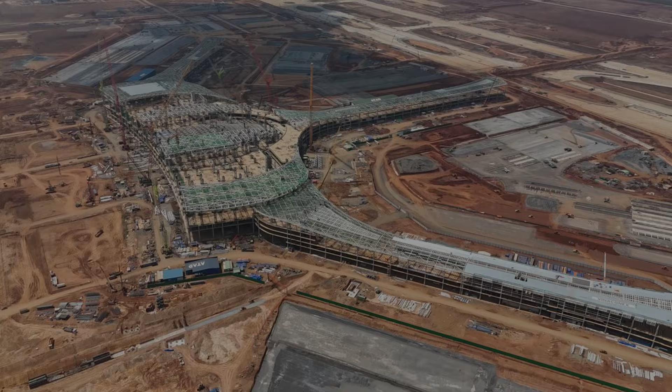Concrete does not merely dominate the construction industry. It is the construction industry, in a way that no other material has ever dominated any other sector of the built environment. It is embedded in every building code on the planet.

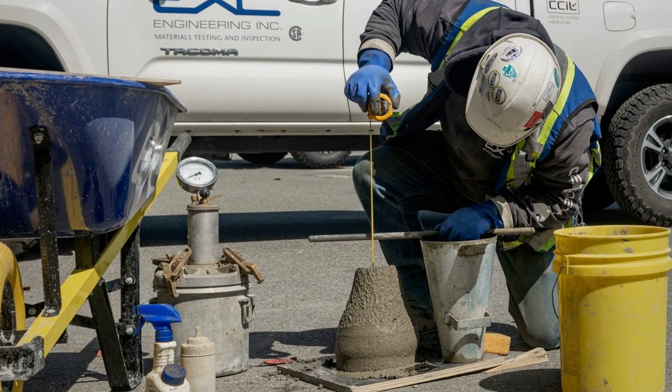The structural calculations that determine how thick a wall must be, how deep a foundation must run, and how wide a bridge deck must span are calibrated around concrete's specific properties and have been for over a century. It is embedded in every engineering curriculum so that every structural engineer trained in the last 100 years has learned to think in concrete first, and ask about alternatives second.

It is embedded in every supply chain, the quarries, the grinding mills, the batch plants, the ready-mix trucks, the pump systems, a global industrial infrastructure worth trillions of dollars that exists for one purpose and cannot be repurposed overnight. The carbon problem inside this system is not a side effect of how concrete is made. It is a consequence of what concrete requires.

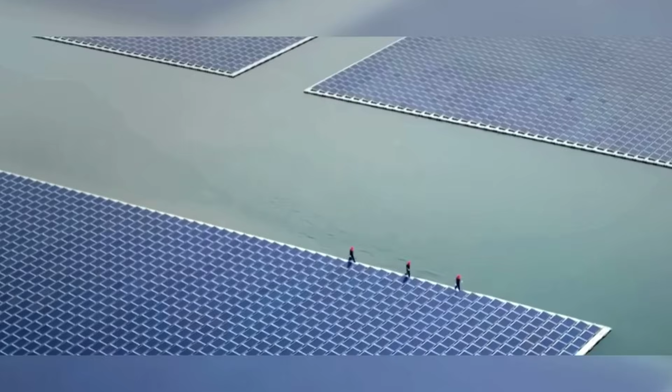Cement, the binding agent that gives concrete its structural properties, is produced by heating limestone to 1,400 degrees Celsius in a rotary kiln. At that temperature, calcium carbonate in the limestone breaks down into calcium oxide and carbon dioxide. This reaction is called calcination. The carbon dioxide it releases is not combustion waste. It is not the exhaust of a dirty power source that could be replaced with a renewable one. It is a direct molecular output of the chemical transformation that makes cement possible.

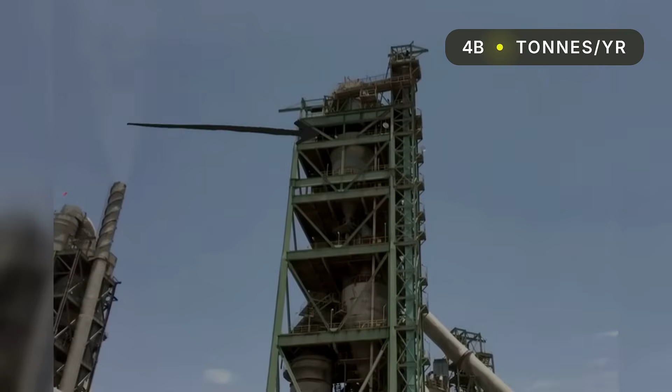Approximately 60% of cement's total carbon emissions come from calcination alone, regardless of what fuel powers the kiln or how efficiently the facility operates. The remaining 40% comes from burning fossil fuels to reach the required temperature, a portion that cleaner energy can theoretically address. The 60% cannot be addressed by an energy transition at all. Global cement production currently stands at approximately 4 billion tons per year, generating roughly 2.9 billion tons of CO2 annually from calcination alone. The industry did not ignore this.

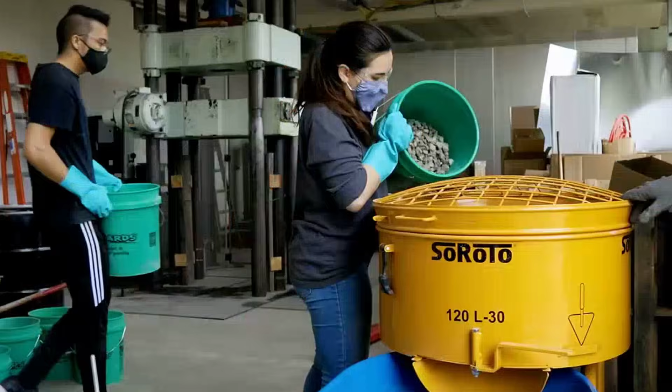Research institutions, engineering schools, and climate bodies spent decades cataloging alternatives. Geopolymer cements, binders made from industrial waste products like fly ash and slag, were identified as a promising path in the 1970s and remain promising today, with a global market share of less than 2%. Supplementary cementitious materials, partial replacements for clinker in the cement blend, have been adopted widely, but hit a ceiling determined by structural performance requirements that conventional building codes will not bend.

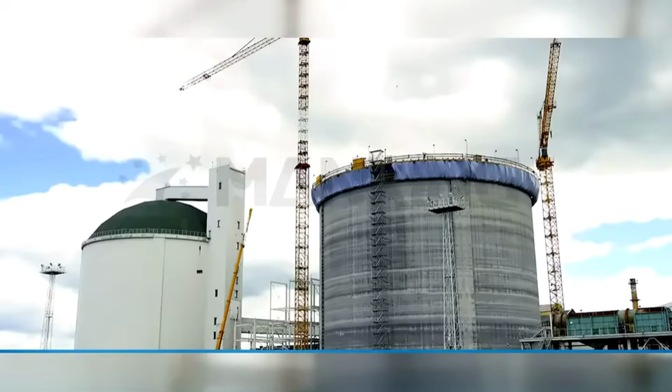Carbon capture, retrofitted to cement kilns, has been piloted at significant expense and remains economically unviable at scale in every competitive construction market on Earth. By the early 2020s, the industry's collective position was not denial. It was something more uncomfortable than denial. It was structural resignation, the acknowledgement that the problem was real, the paths were insufficient, and demand was not slowing down.

Global cement consumption is projected to grow by 12 to 23% by 2050 as South and Southeast Asia continue urbanizing at rates the developed world has not seen since the mid-20th century. The lock system was not shrinking, it was expanding. The research coalition that changed this did not emerge from the institutions that had been working longest on the problem. It was not a European cement company with decades of carbon capture investment, not a North American materials science consortium backed by Climate Foundation grants, not a United Nations industrial transition program.

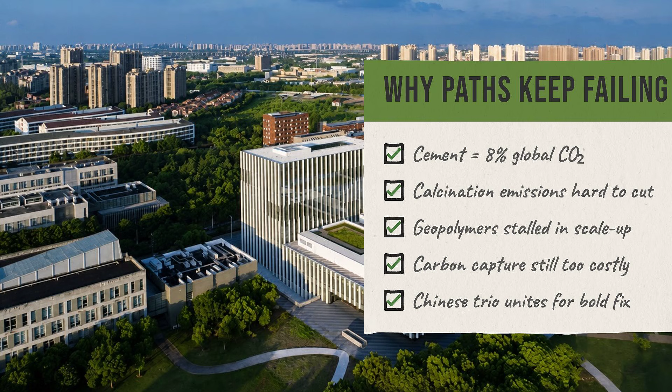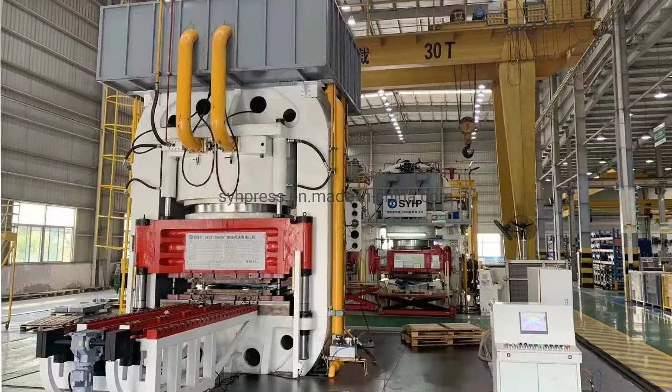It was a coordinated, multi-institution effort spanning Tongji University, the China Building Materials Academy, and Shanghai Jiao Tong University, three institutions with overlapping but distinct technical competencies, whose collaboration on this specific question appears to have been deliberate rather than incidental, and whose combined resources included industrial-scale hydraulic pressing equipment that most university research facilities in the world do not possess. The prevailing research direction in construction materials science at the time was focused logically enough on the ingredients.

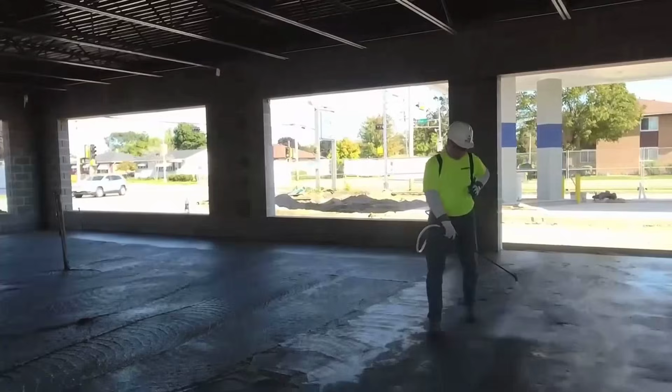If the carbon problem is in the limestone, change what you use instead of limestone. If the durability problem is in the water to cement ratio, develop chemical admixtures that allow lower ratios without sacrificing workability. If the structural ceiling is in the aggregate bond, develop new surface treatments that improve adhesion at the microscopic level. These were reasonable questions pursued by serious researchers, and they had produced incremental gains over 4 decades without producing a result that restructured the economics of the material at scale.

The Tongji-CBMA-SJTU team approached the problem from a different angle. Not the ingredients, not the chemistry, not the binding mechanism. They asked instead what happens to concrete in the 30 seconds after it leaves the mixer, the window during which fresh concrete is still a plastic, workable material whose final microstructure has not yet been determined by the hardening process.

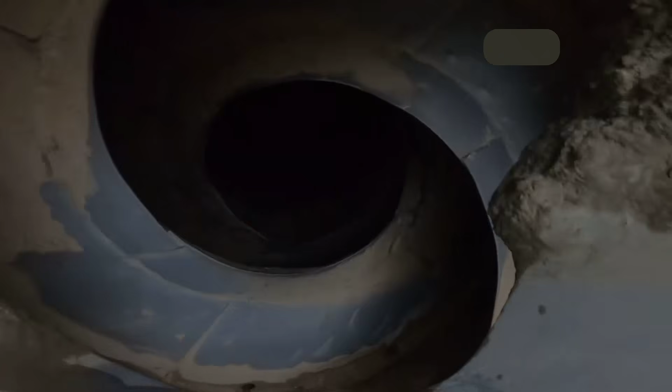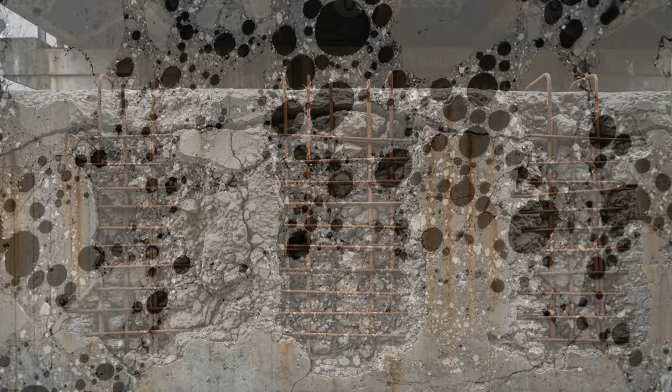In that window, the mix contains excess water beyond what the hydration reaction actually requires, and it contains trapped air introduced during mixing. Both are structural liabilities. Excess water, as it migrates out during curing, leaves behind a network of capillary pores. Trapped air remains as voids. Both reduce density, reduce strength, and create pathways for water, chlorides, and other agents of long-term deterioration to enter the hardened material over decades of service life.

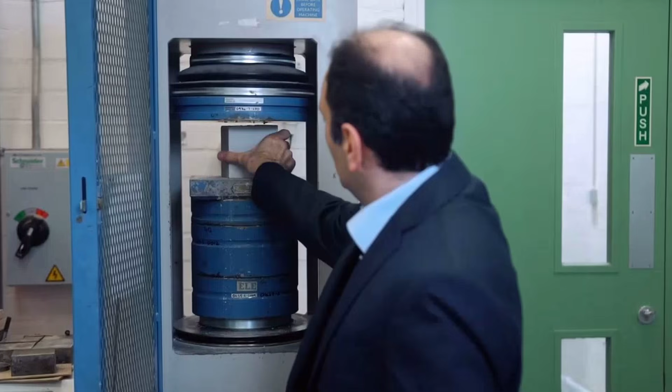The team's hypothesis was straightforward. If you could mechanically remove those liabilities before the concrete hardened, the material you were left with would be fundamentally denser and stronger than anything the same ingredients could produce under conventional curing.

They published the results under a fully open license, raw data sets, microscope imaging, and nanomechanical test results made available to any research institution or engineering body that wanted to examine them, at a moment when the industry's default posture toward process innovation was proprietary lockdown.

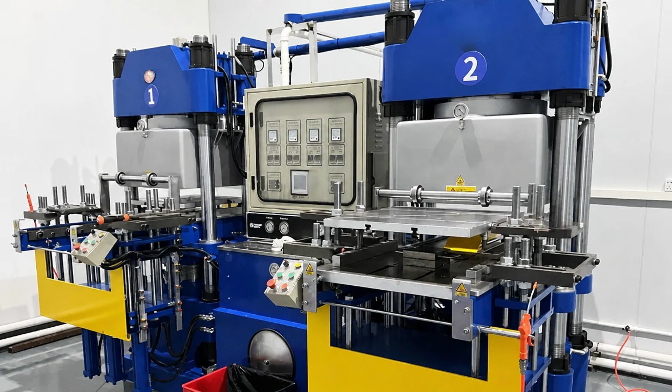The process is called compression casting. Fresh concrete, mixed to standard specifications using standard cement, standard aggregate, and standard water, is placed into a hydraulic press and subjected to between 5 and 15 megapascals of applied pressure while still in its plastic state.

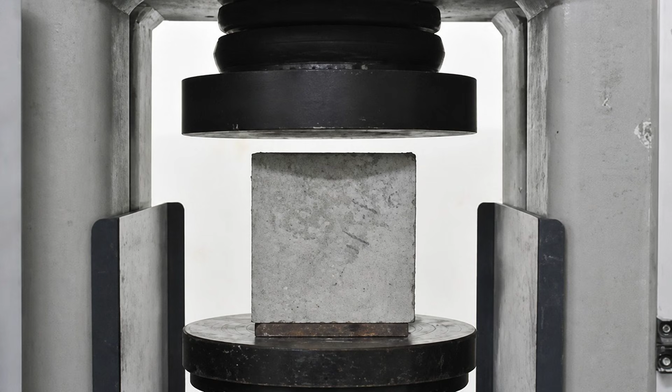1 megapascal is approximately 145 pounds per square inch. The pressures used in compression casting are, at the upper range, equivalent to the force at the bottom of a column of water 1.5 kilometers deep. Applied to wet concrete, that force does two things simultaneously.

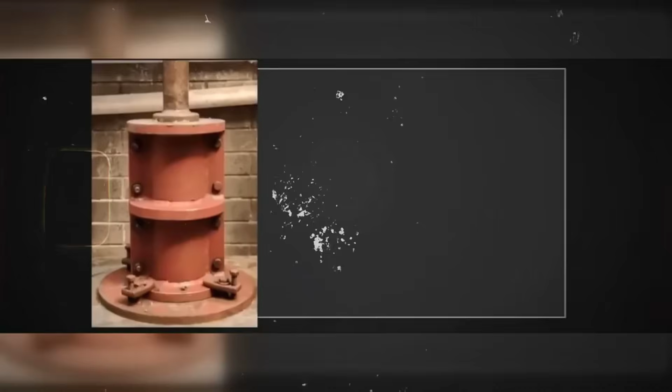First, it expels excess water and trapped air, the two structural liabilities the Tongji CBMA-SJTU team had identified as the primary sources of long-term weakness, are driven out of the mix under pressure. What remains is a denser, more uniform matrix with a substantially lower water to cement ratio than the mix started with, achieved not by reducing the water added during mixing, but by removing it mechanically after mixing, a distinction with significant practical consequences for workability and placement.

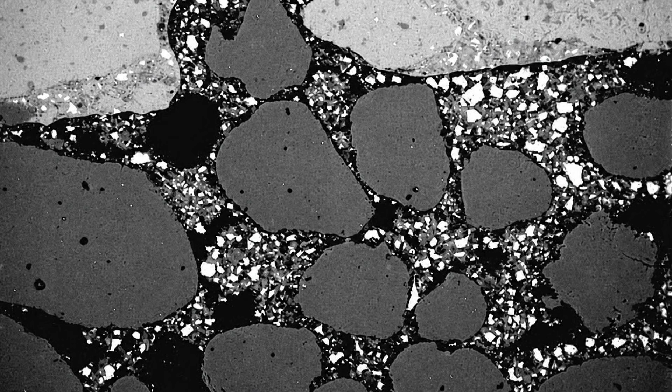Second, it collapses the interfacial transition zone, the boundary layer between cement paste and stone aggregate, historically the weakest point in any concrete structure. Under standard curing conditions, this zone has a higher void content than either the paste or the aggregate on their own, because water films form around aggregate particles during mixing and impede the tight packing of cement grains at the contact surface. Under compression, those voids collapse.

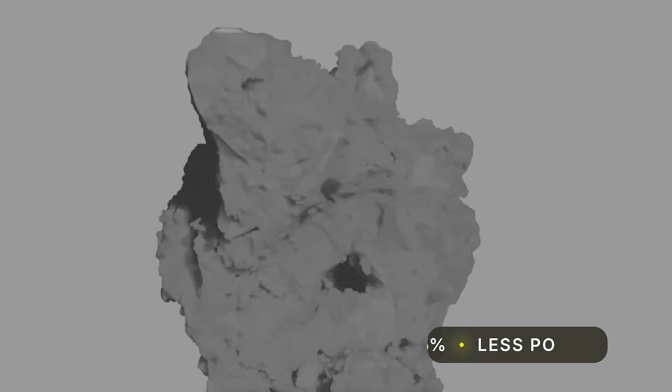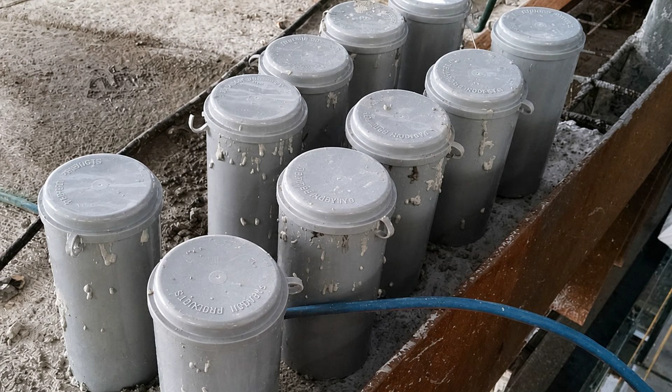The team's measurements showed a 35% reduction in void content at the transition zone compared to equivalent standard cured concrete. Total internal porosity across the sample fell by 45%. The consequences cascade. A 45% reduction in porosity does not produce a 45% increase in compressive strength. The relationship between density and strength in concrete is nonlinear. At the highest pressure ranges tested, compressive strength increased by over 80% relative to identically proportioned standard concrete.

Resistance to water intrusion improved substantially. Resistance to freeze-thaw cycling, the mechanism responsible for a significant share of infrastructure deterioration in cold climates, improved. Resistance to chloride penetration, the process by which dissolved salts migrate through concrete and initiate corrosion of steel reinforcement from the inside outward, improved to a degree that projected service life extensions measured in decades rather than years. Same cement, same stone, same water, different handling.

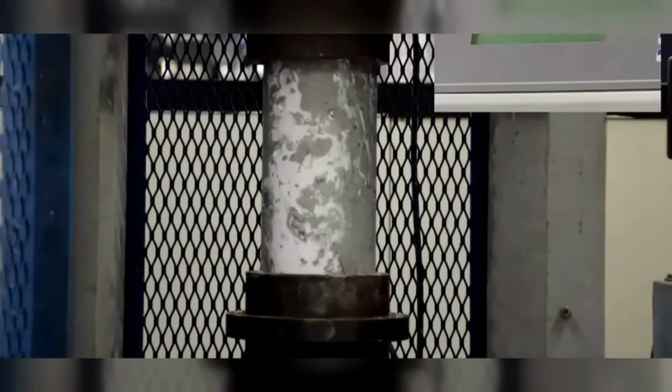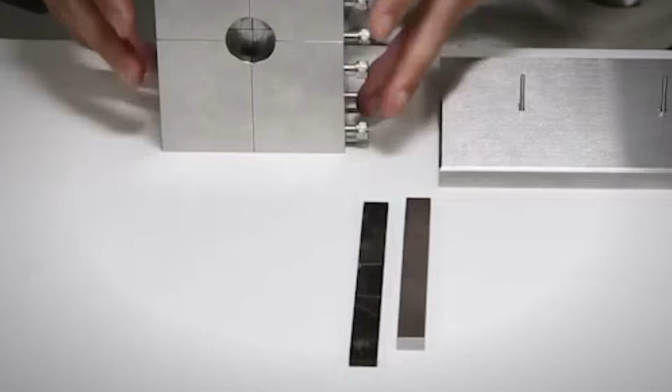Engineers in Germany, Japan, and South Korea responded by filing patent families and initiating highway trials before the ink on the published datasets had finished drying. The laboratory results were, by any measure, exceptional. An 80% compressive strength gain from a process change requiring no new materials is not the kind of result that appears in peer-reviewed construction engineering literature without attracting immediate and intense scrutiny, which is precisely why the Research Coalition did not ask the engineering community to take the laboratory results on faith.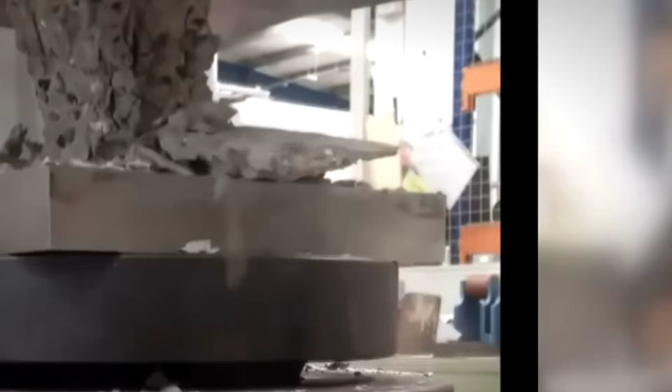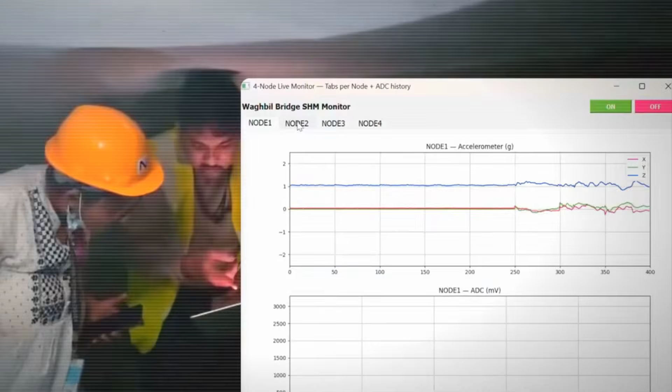They built a bridge. The Jiang River Trial, 150 meters of bridge deck, constructed using compression cast concrete and instrumented throughout with continuous strain gauges and moisture sensors, was not a controlled laboratory environment. It was a working structure, subjected to live traffic loads, seasonal temperature variation, and the full range of environmental stresses that determine whether a material performs in the real world the way it performs under controlled conditions. The sensors embedded in the deck were not there to make the structure more interesting. They were there to generate a continuous, publicly available record of in-service performance that any engineer anywhere could examine independently.

Over 12 months of monitored service, the bridge deck delivered an average in-service compressive strength of 61 megapascals. The laboratory models had predicted 61 megapascals. The match was not approximate. It was exact. Or as exact as measurement precision in civil engineering field conditions permits, which is a different and more meaningful standard than laboratory precision, because it incorporates every source of real-world variability that laboratory conditions exclude by design.

Zero visible cracking was recorded across the full observation period. Moisture sensor readings remained stable throughout, indicating that no water intrusion pathway had developed in the hardened concrete matrix despite 12 months of cyclic loading and environmental exposure.

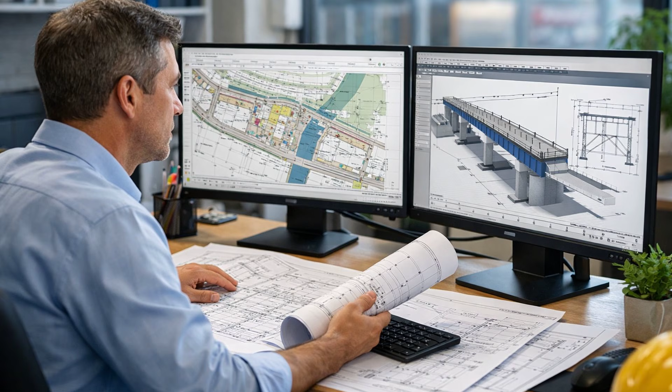What the Jiang trial produced was not a press release. It was independently verifiable field evidence, a data set available to any research institution or government engineering body that wished to replicate the analysis, stress test the conclusions, or use the performance record as the basis for regulatory review. The global engineering community had been handed not a claim but a proof, documented in a format designed to withstand the scrutiny of the most demanding technical audiences in the world.

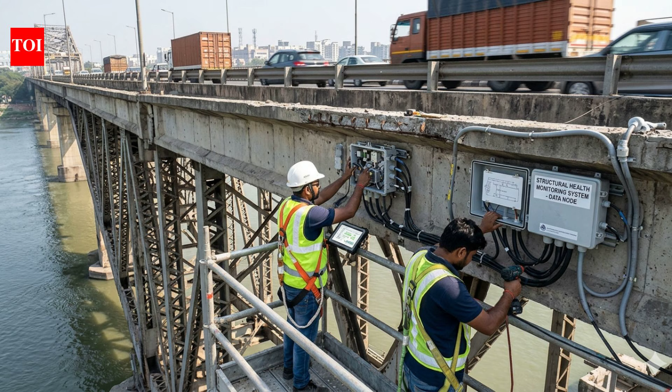Research teams in Germany had already begun highway trials using compression cast prefabricated elements. Japanese infrastructure planners had begun regulatory review. South Korean engineering firms had begun integrating the process into smart city pilot programs. The field evidence had arrived, and it had matched the laboratory predictions with a precision that left the skeptical case with very little to stand on.

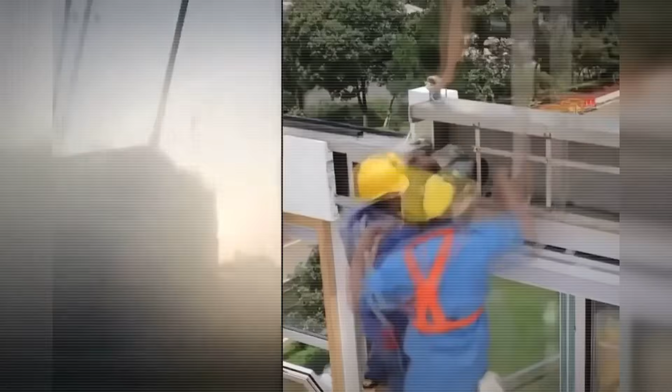Compression casting makes concrete significantly better. What Broad Group built makes concrete significantly less necessary. B-Core is a structural panel system developed by Broad Group, a Chinese construction technology company whose previous work had already established a track record of building at speeds that conventional construction timelines treat as physically implausible.

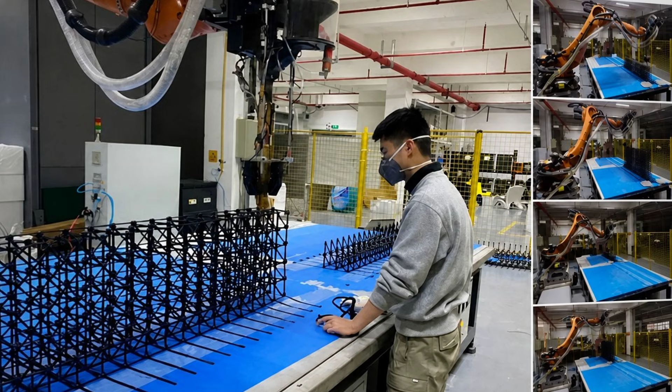The panel's architecture is straightforward to describe and difficult to fully appreciate without seeing the load data. Two thin steel skins, outer faces that provide the structural surface, are separated by a geometric lattice of hollow tubes engineered to tolerances more commonly associated with aerospace manufacturing than civil construction. The result is a panel that weighs less than 1/10 of a reinforced concrete slab of equivalent dimensions while carrying equivalent structural loads. Not comparable loads. Not loads within an acceptable engineering margin. Equivalent loads, verified under standardized testing conditions.

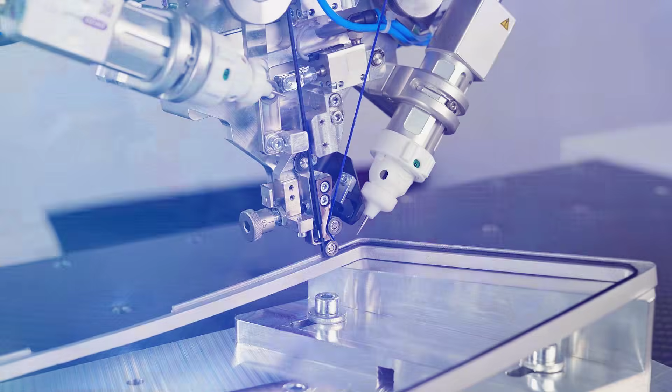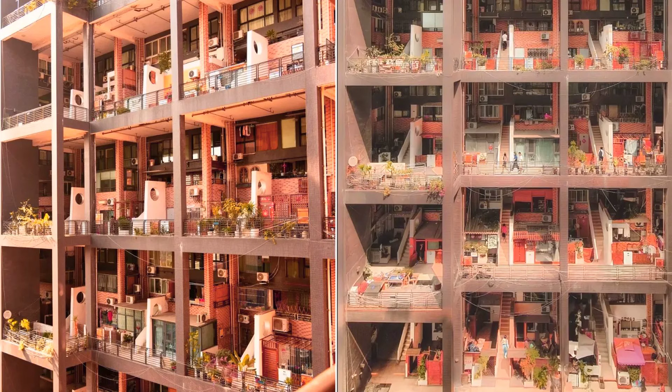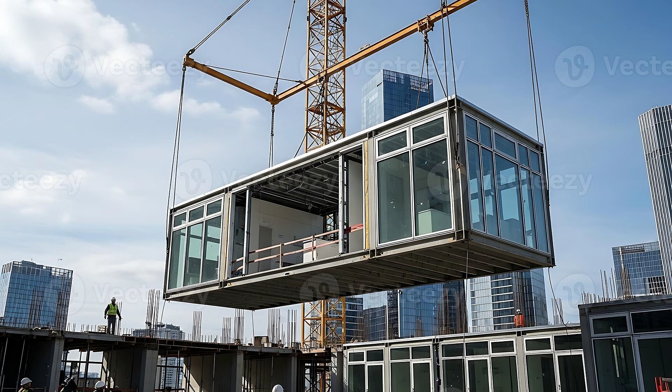The assembly system that delivers BCor panels to a building site uses robotic fasteners, connection hardware designed with the same philosophy as the panels themselves, which is that every variable the engineering process can eliminate, it should eliminate, because every variable is a source of delay, error, and cost. The consequence of this philosophy was demonstrated in Changsha in 2025, when a 10-story building was completed in under 30 hours. Not a prefabricated show structure for an expo audience. A building, 10 stories, 30 hours.

The speed was not a product of workers moving faster. It was a product of a system engineered for assembly, the way aircraft fuselages are engineered for strength to weight. Every component designed to connect to every other component with a minimum of adjustment and a maximum of precision, so that the act of construction becomes closer to the act of assembly than to the act of building in the traditional sense.

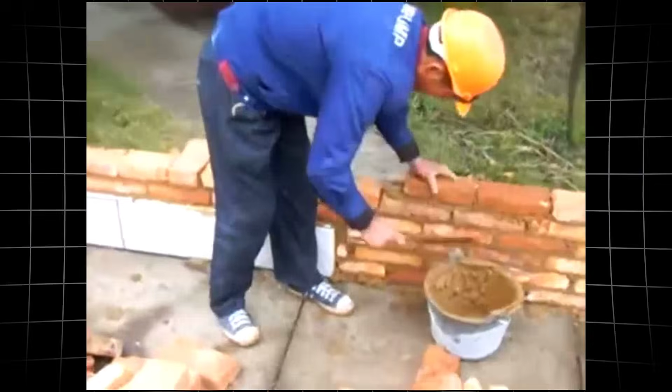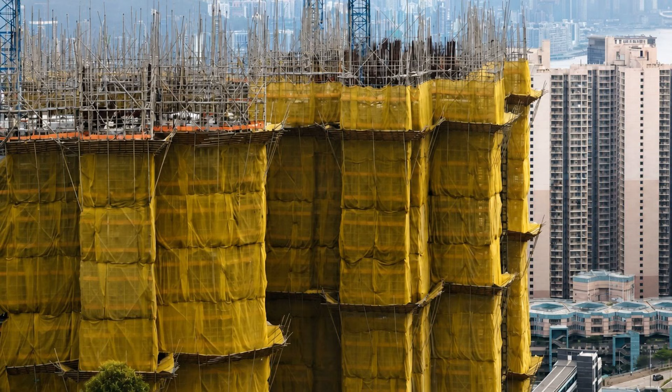The seismic performance data adds a dimension that moves BCor from impressive to strategically significant. In earthquake load testing conducted under conditions corresponding to the seismic risk profiles of the most densely populated construction zones on Earth across East Asia, South Asia, and the Western Americas, BCor structural frames outperformed conventional reinforced concrete frames. For the countries where earthquake resilience is not a premium feature but a baseline construction requirement, this is not a marginal improvement. It is a different risk equation entirely.

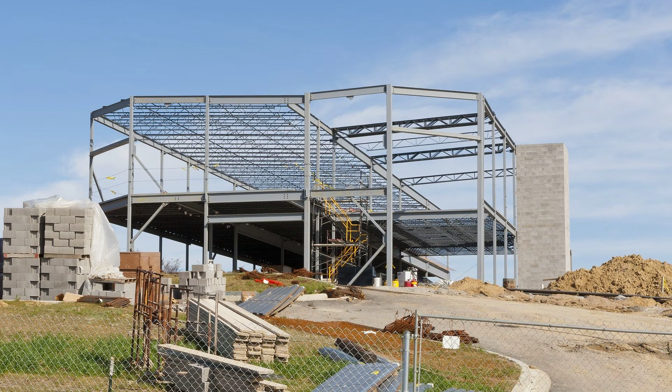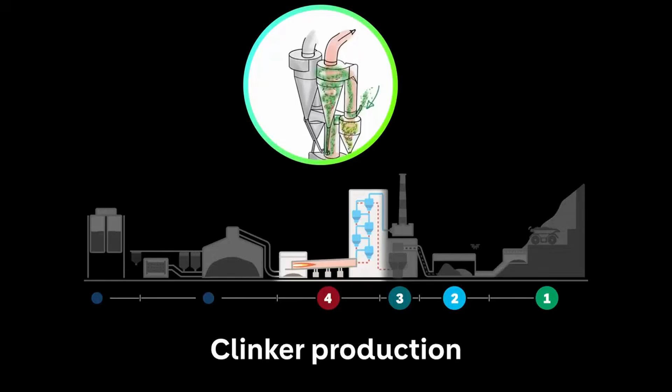BCor does not compete with compression cast concrete. In structural applications where it is deployed, it removes the need for concrete columns and load-bearing walls almost entirely, which means the question of what happens when both technologies operate in the same construction environment is not a theoretical one. When compression casting and BCor operate together in the same construction environment, the effects on cement consumption, carbon output, construction time, and post-installation maintenance cost do not add. They multiply. Here is the honest picture.

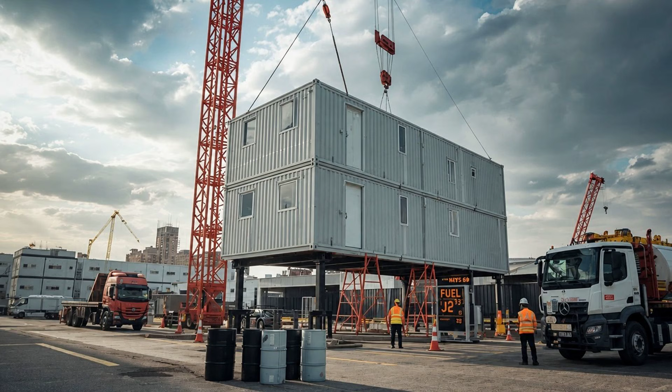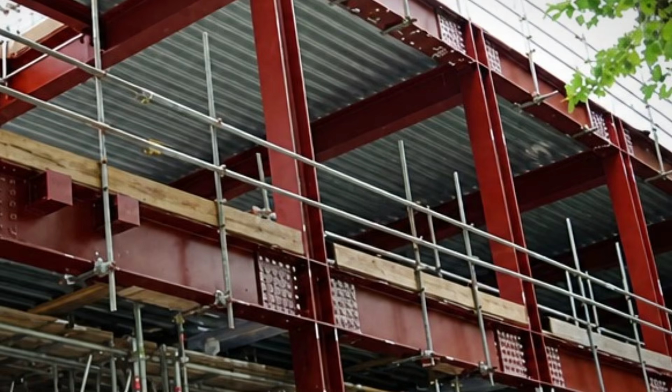BCor panels carry structural loads that would otherwise be carried by reinforced concrete columns and walls. Wherever a BCor panel replaces a concrete structural element, that concrete is not produced more efficiently. It is not produced at all. The cement that would have been required to manufacture it, the water, the aggregate, the carbon embedded in the calcination reaction, the transport cost, the on-site placement time, all of it is removed from the project's balance sheet simultaneously. In a mixed BCor and compression cast concrete building, the portions of the structure that still require concrete benefit from a 40% reduction in cement consumption per cubic meter at equivalent compressive strength, because compression casting achieves higher density with less binding material. The portions that do not require concrete have been replaced entirely.

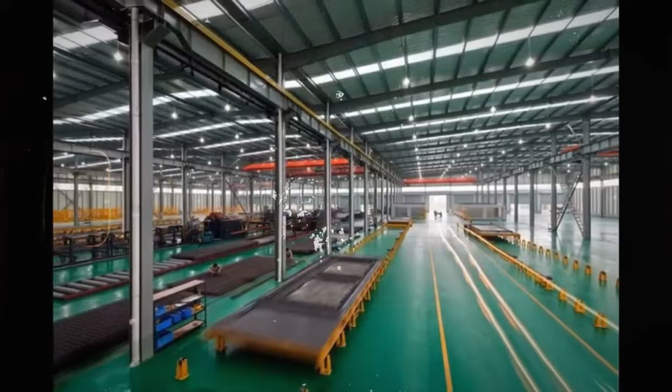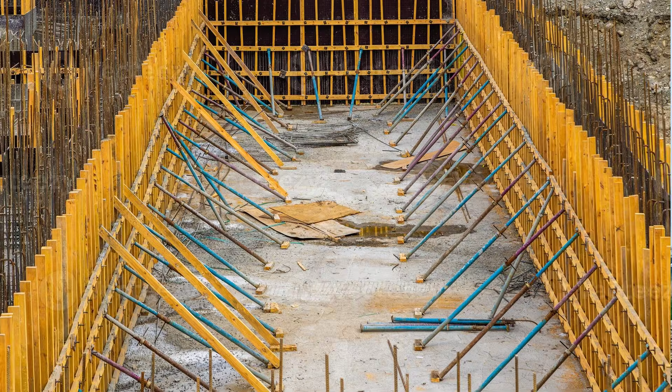Construction time compresses from both directions. BCor's assembly speed reduces the time required to raise the structural frame. Compression cast concrete elements, produced as prefabricated components under controlled industrial conditions, arrive on site already cured to their full design strength, eliminating the multi-week waiting periods that on-site poured concrete imposes on every subsequent stage of the construction schedule. A project that would take 18 months under conventional methods does not take 12 months under the combined system. It takes less, because the time savings are not sequential, they are concurrent.

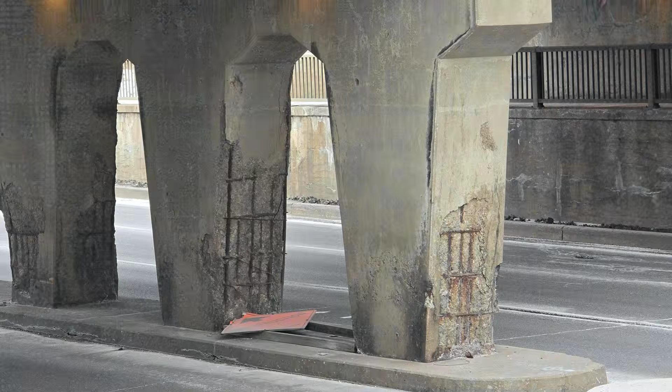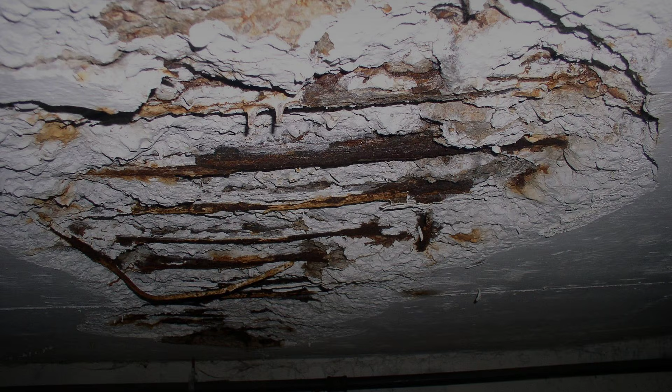Post-installation maintenance costs shift on a longer timeline, but by a larger magnitude. Compression cast concrete's 45% reduction in porosity translates directly into reduced chloride penetration rates, reduced freeze-thaw deterioration, and reduced water intrusion, the three primary mechanisms of concrete infrastructure decay in the climates where the largest share of global construction takes place. Structures that would require significant remediation at 25 years of service life now project to reach 40 or 50 years without equivalent intervention. The reduction in lifetime maintenance cost per structure, aggregated across the volume of infrastructure being built in developing economies over the next 3 decades, is not a rounding error. It is a number that changes the long-term economics of public infrastructure finance.

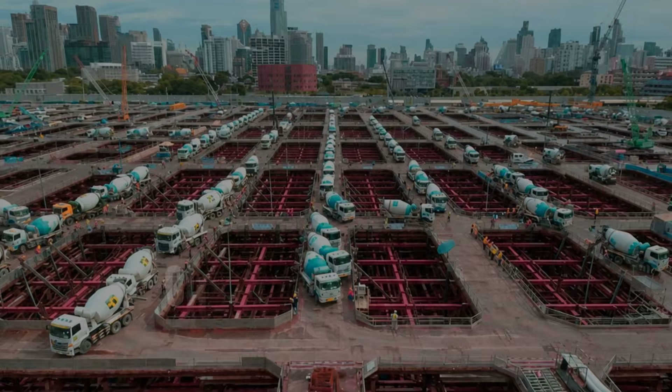This is not a story about greener concrete. It is a story about who restructures the fundamental economics of the substance that holds up the built world, and who does not.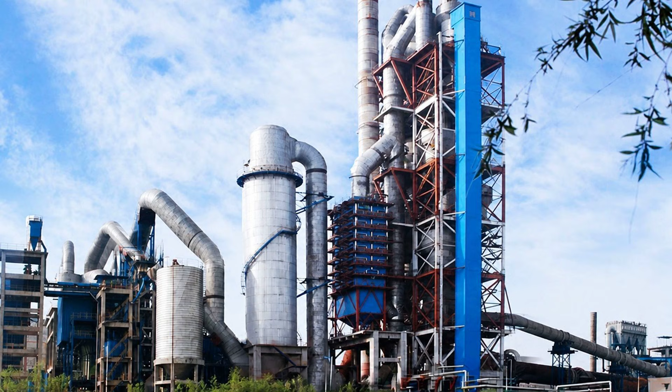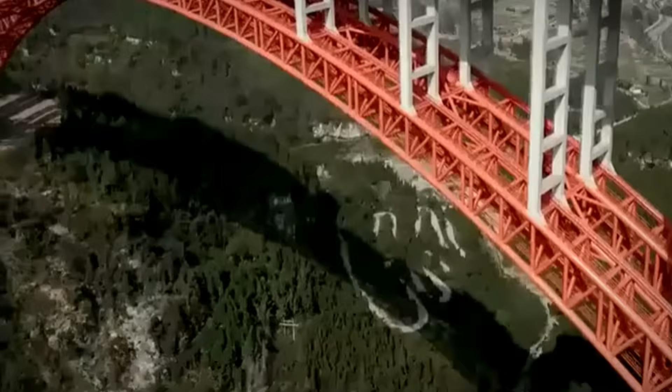To understand why China developed these technologies, it is necessary to understand the scale at which China builds. Between 2011 and 2013, a single 2-year window, China consumed more cement than the United States consumed across the entire 20th century. Not more per year. More in total. Every highway, every dam, every skyscraper, every public housing block, every industrial facility constructed in the United States between 1900 and 2000 required less cement than China used in 24 months.

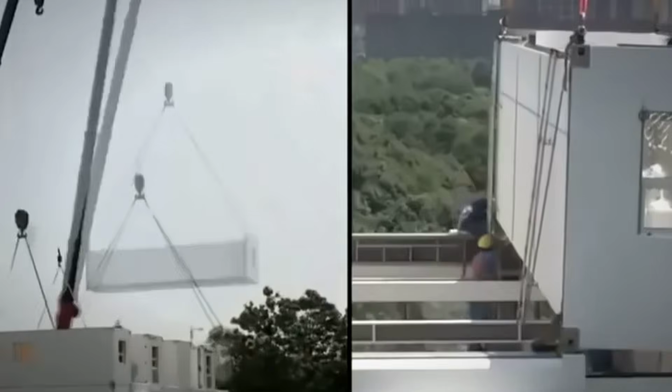China did not develop compression casting and BCor from an environmentalist position. It developed them from the position of the world's largest builder, confronting simultaneously the world's largest carbon liability, the world's most acute pressure to reduce construction costs, and the world's most urgent need to build faster than conventional methods allow. The open license under which the compression casting research was published was not an act of scientific generosity in tension with China's strategic interests. It was consistent with them.

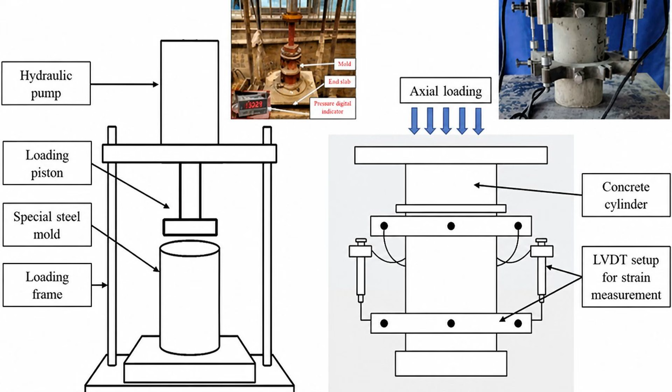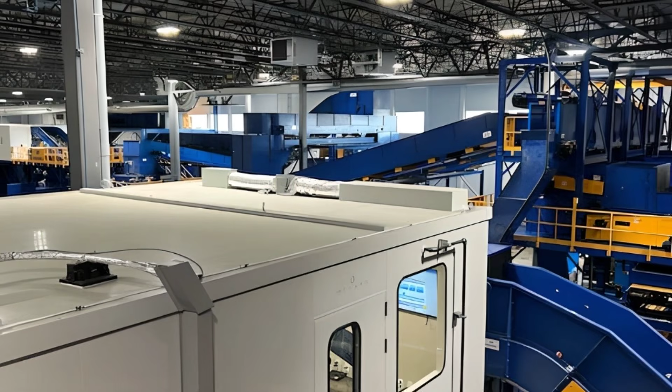The research was published with full datasets, raw results, and nanomechanical imaging at a moment when 34 international patent families covering compression casting process variations, equipment configurations, and application-specific implementations had already been filed. The blueprints were made available to the world. The mechanisms required to implement those blueprints at industrial scale, such as the pressing equipment, the process control systems, and the prefabrication infrastructure, are manufactured, exported, and licensed primarily by Chinese companies.

The export data makes the export position concrete in the most literal sense. Chinese carbon-cured concrete additive exports to the United States, the United Kingdom, and Southeast Asia increased 5-fold in the 2 years following the open publication of the compression casting research. Beijing Cement Group signed a 5-year licensing agreement with Lafarge Holcim, the world's largest cement manufacturer, covering prefabricated compression cast construction for the European market.

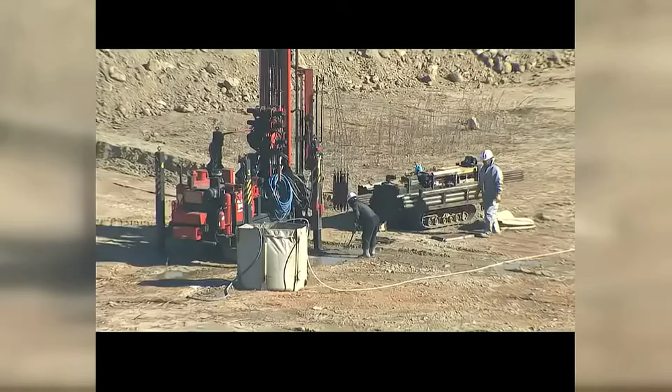Obayashi Corporation, one of Japan's largest construction companies, entered a joint research program. Berlin highway authorities began field trials of compression cast road panels manufactured using Chinese process equipment. Hyundai Engineering's Smart City division in South Korea integrated BCor panels into its flagship pilot program. Osaka Expo infrastructure planners specified compression cast prefabricated elements for permanent structures across the exhibition site.

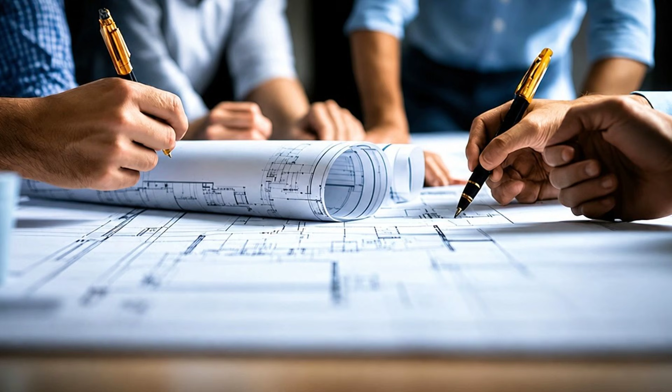China handed the world the blueprints. It positioned its own manufacturers, exporters, and licensors at the center of every supply chain required to build with them. What looks from a distance like a contribution to global decarbonization is, at closer range, a structural insertion into the next generation of construction technology at planetary scale. This is the precise moment when the world's building codes, infrastructure programs, and construction companies have no viable alternative to engaging with it.

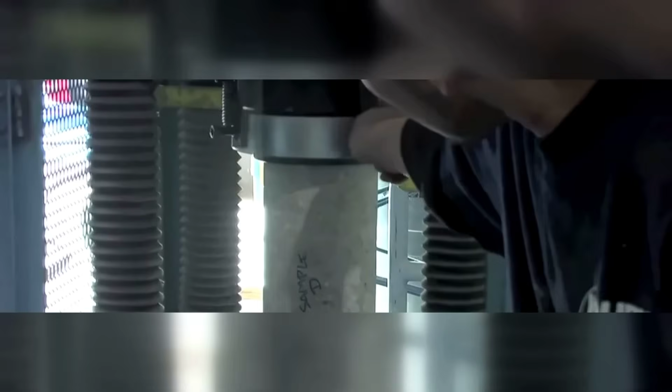Life cycle models developed by construction engineering research groups in Europe and East Asia project that applying compression casting to just 30% of new global structural concrete, not all concrete, not even most concrete, just 30%, would eliminate approximately 850 million tons of carbon dioxide annually.

The Germany comparison is the one that makes that number land with the weight it deserves. 850 million tons is more than the entire national greenhouse gas emissions of Germany, from every source combined, every car, every factory, every power plant, every agricultural operation, every heated building across one of the largest industrial economies in Europe, eliminated each year, not by replacing Germany's energy system, but by changing what happens to wet concrete in the 30 seconds after it leaves the mixer, applied to less than a third of the concrete being poured.

The framing of this as a climate story is incomplete. In any construction market that has implemented carbon pricing, and the number of those markets is not shrinking, the cost advantage of 40% less cement per cubic meter, combined with 80% higher compressive strength, is not a trend that construction companies will choose to adopt when the conditions are right. It is a competitive reality they cannot afford to ignore when a competitor has already adopted it.

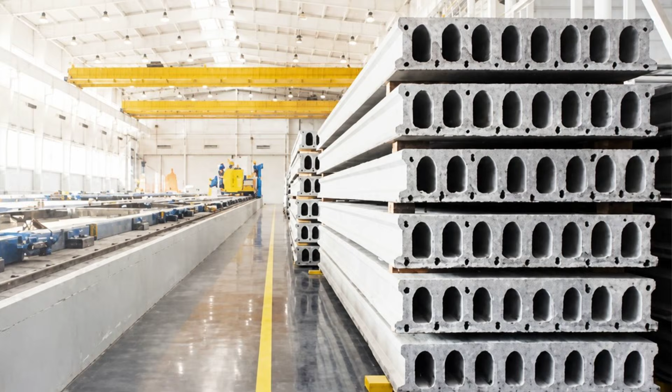The carbon benefit and the cost benefit point in the same direction. Carbon pricing makes the cost advantage larger, not smaller, as the price of emitting carbon dioxide rises. The adoption argument is not a climate argument dressed in economics. It is an economics argument that happens to produce a climate outcome.

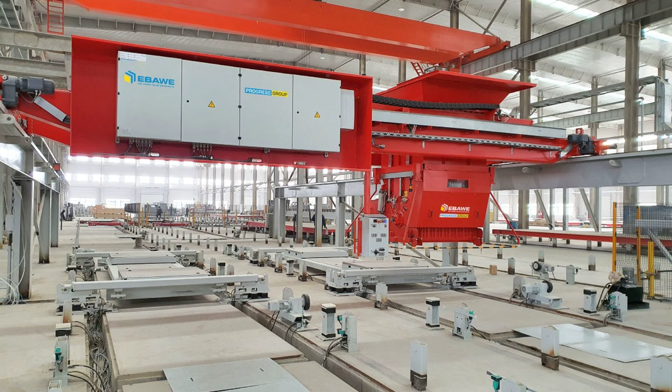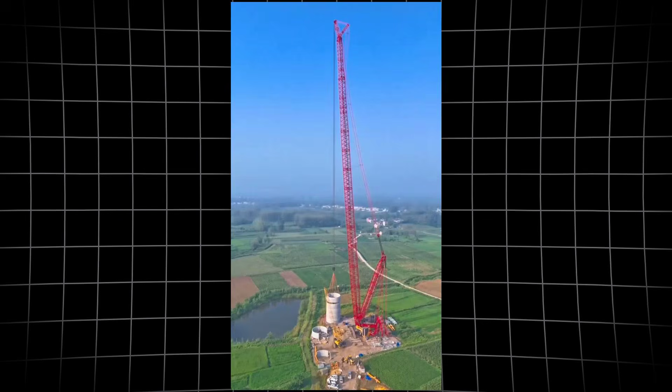China has not positioned itself to benefit from this transition when it arrives. It is already inside it, as manufacturer of the pressing equipment, as licensor of the process patents, as exporter of the additive compounds, as standard setter in the prefabricated construction systems that the world's largest infrastructure programs are beginning to specify.

The moment when global building codes are being rewritten, when construction companies in Europe and East Asia are selecting the technical standards their supply chains will align to for the next 30 years, is not approaching. It is now. And the entity that arrived at that moment as manufacturer, licensor, exporter, and standard setter was not late.

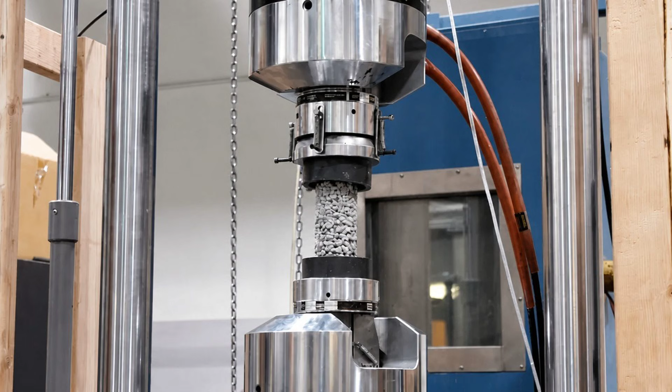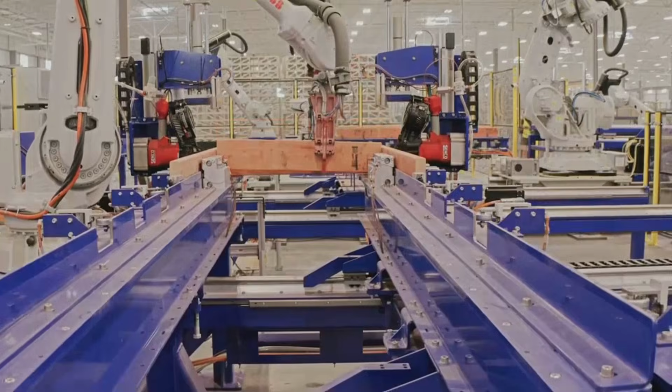The question for every construction market outside China is not whether these technologies will restructure how the world builds. The structural and economic evidence has already settled that. The question is whether those markets will write their own standards, or whether the standards will simply arrive already written, already embedded in the supply chains they depend on, already set.